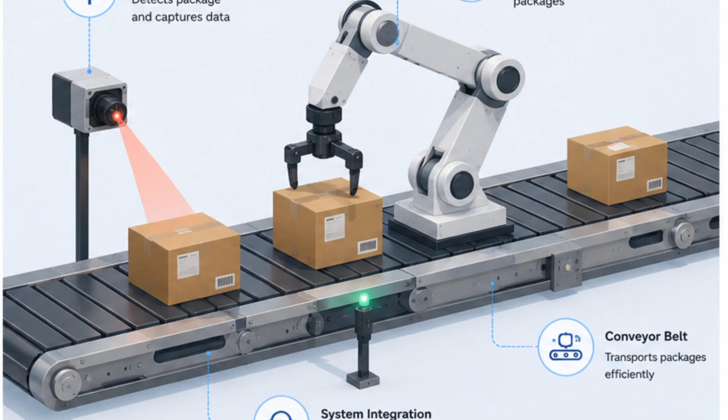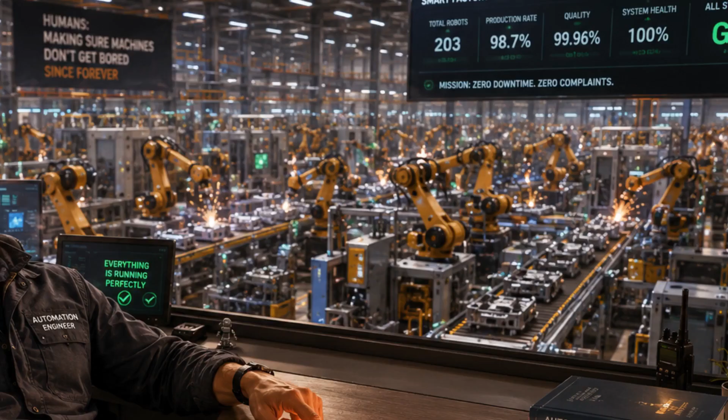In this video, we explore industrial automation, a field so powerful that it turned the humble conveyor belt into the backbone of the modern world, and convinced engineers everywhere that the best human intervention is minimal human intervention. No offense to the humans watching this video.

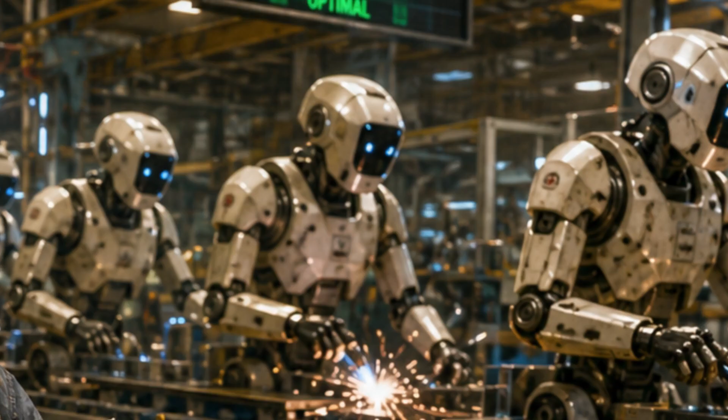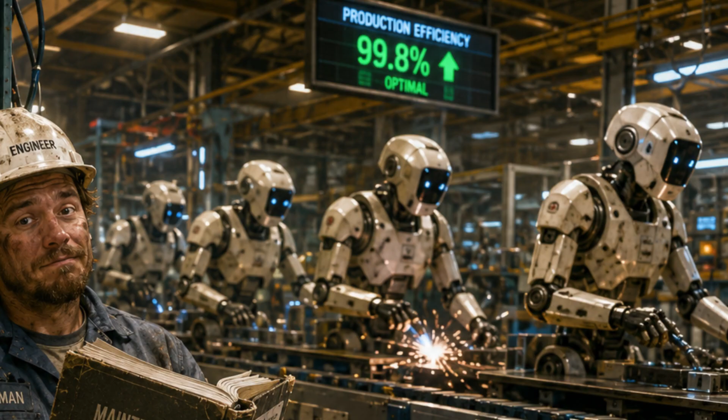We are still useful, mostly for defining the conditions, and still very important. People often say automation is replacing human jobs. Another opinion is: not yet. We built these machines so we don't have to work, and now we are spending all our time maintaining them. So honestly, the job is very much still there, and those cables are bringing in data and sending away commands to different machines.

Now think about the last time you used an app while resting in an air conditioned room, or saw a package delivered at your home. Behind every one of these moments, there is an automated system making it happen.

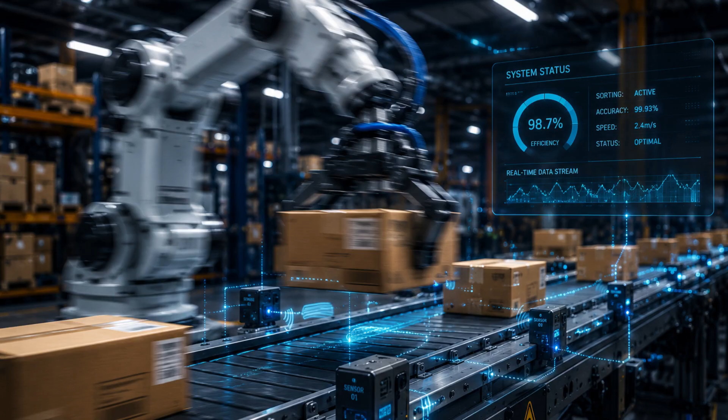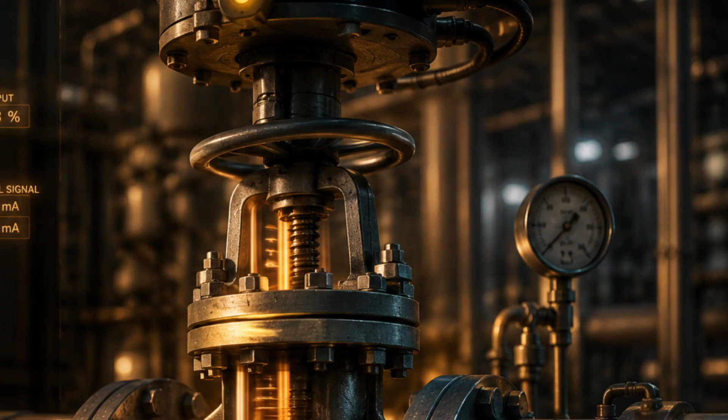Somewhere out there right now, a robotic arm is sorting packages it has never touched before. A system, with the help of sensors and actuators, is making decisions faster than we blink. And a valve in an industry is opening and closing based on logic that an engineer carefully designed for that exact purpose. This is automation in action.

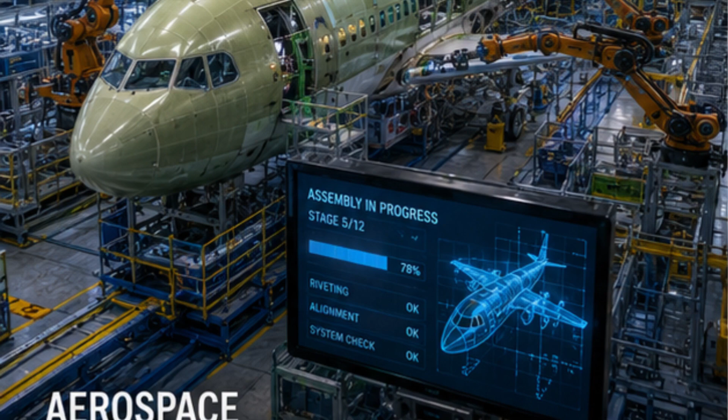Automation is no longer a specialty locked inside factories. It runs through healthcare, agriculture, aerospace, and every industry you can name. This is the foundation. Once you understand how these systems think, sense, and act, you will never look at the world around you the same way again.

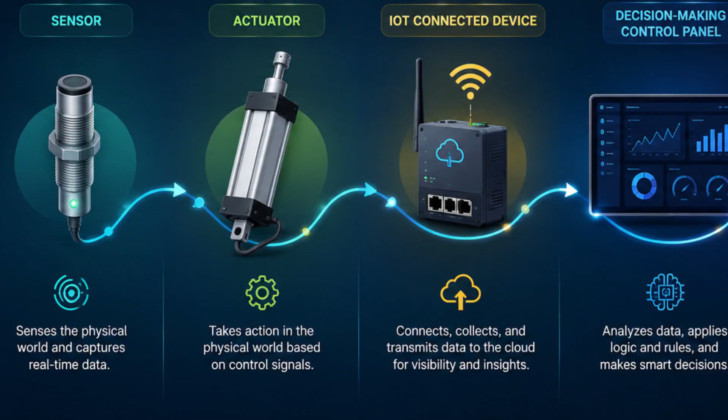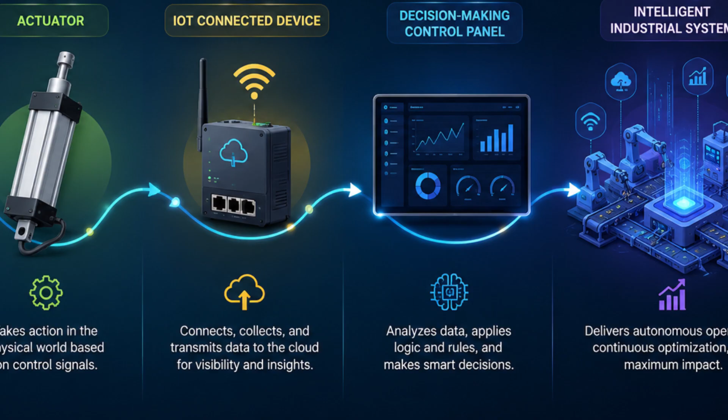So this video will take us from the very foundation, sensors, actuators, IoT, and decision making systems, all the way to the intelligence behind modern industrial control. The topic of today's session is industrial automation.

Before we start, imagine you are driving a car on a street and suddenly a kid jumps in front of you. What will you do? Will you apply the brake or further accelerate? Of course, apply the brake. If we want to understand this process, first we used our vision sensor, our brain processed it and decided to apply the brake, and accordingly different signals are sent to different muscles so that we can apply the brake.

This is how automation in industry is working. Through this session, we will understand how industrial automation works and how it has evolved throughout different industrial revolutions. The first question is: what is industrial automation?

To understand this, we have an image showing an old industrial setup where workers manually move different kinds of boxes and sort them, inspecting each box separately. After some advancement, motorized conveyor belts were introduced. The movement of boxes from one place to another became a little easier than before, but workers were still manually inspecting and organizing them.

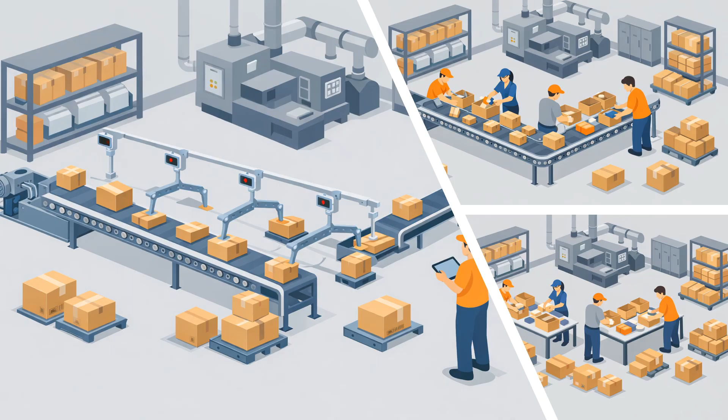With further advancement, we now have sensors, actuators, and robotic systems. The inspection process previously done by workers is now done by different sensors, and items are moved accordingly through actuators and robotic arms. Looking at all these scenarios collectively, from manual to automated systems, the number of workers has reduced, the effort given by workers has reduced, but the operational performance has significantly increased. This is how industrial revolution has been observed.

So what is industrial automation? It is the use of control systems to operate industrial processes with minimum human intervention. This is how we can define industrial automation.

For the foundation of automation, this is a very good example: in our body we have different sensors, we have eyes, we have skin. Through skin we can feel touch. Through these sensors, data goes to the brain, and the brain processes it and decides what action has to be performed, and accordingly different signals are sent to different muscles. Recall the first example: when the brain decided to apply the brake, it sends signals to our leg, foot, arm and hands, and collectively we apply the brake.

Taking this example to industry, we have different sensors in the industry. In this example, we can see a temperature sensor and a controller. The temperature sensor's information goes to the controller, which is designed by the engineer, and based on that design, a specific action will be performed. For example, if temperature rises above 30 degrees centigrade, the fan will be turned on. So the fan in this example is the actuator.

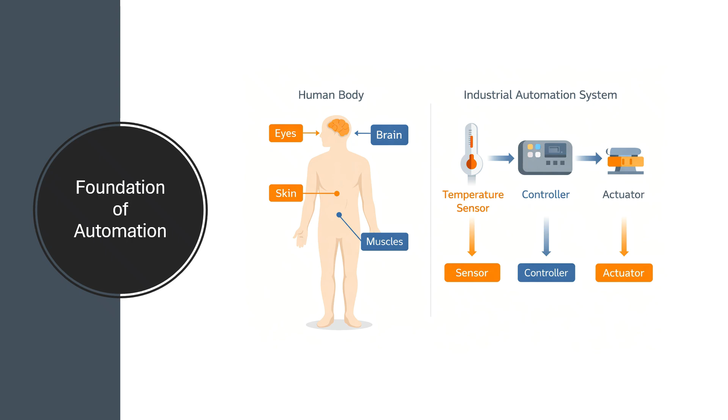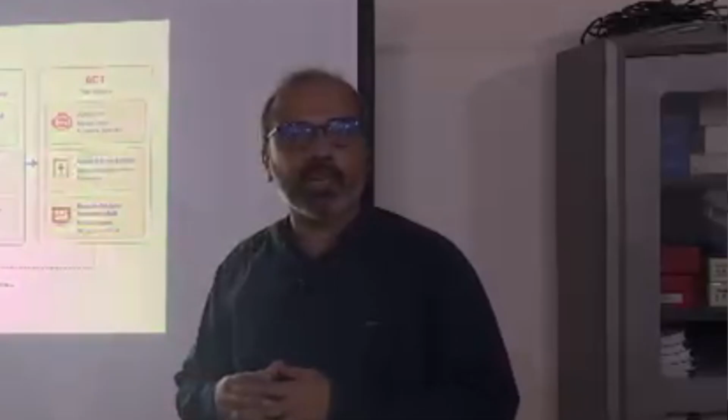So far we have heard three main components: sensing, decision making, and actuation. What is sensing? In industry we have different kinds of sensors: sensors for temperature, pressure, flow, either for fluids or for air. Once we have different sensors available, the data coming from sensors goes to the processors, and the processor decides whatever action is needed, and that action is performed by different actuators. In order to perform that physical motion, the controller has to send different signals to all the actuators.

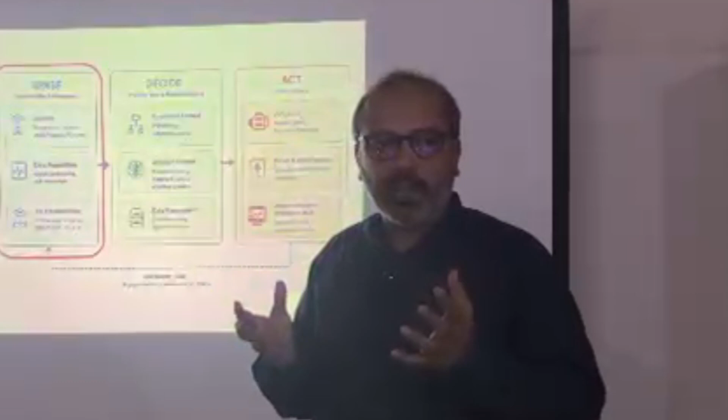So the movement and transportation of data through this system is done by IoT today. You have heard about IoT, right? So what are things in IoT? Let's see: we can see a sensor, a conveyor belt with a motor inside, and a robotic arm.

These entities are things in IoT, and those things are either generating data. Based on that data, the controller will be deciding something, and after the decision, based on the signals from the controller, the actuator will perform some action. All these things collectively communicate through some protocol, which can be wired or wireless, and there are several such protocols available for IoT. The data coming from different sensors and sent to different actuators is stored somewhere, and that data is not garbage.

That data is very important for analysis. Analysts can observe and analyze the data and identify which problem occurred at what time, so in the future, to avoid such errors, certain modifications in the system can be made.

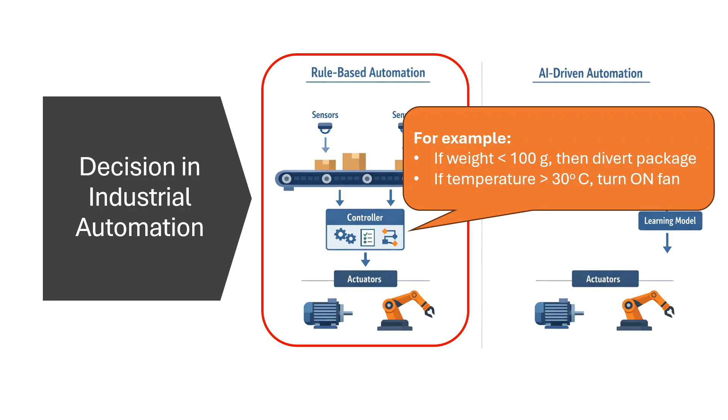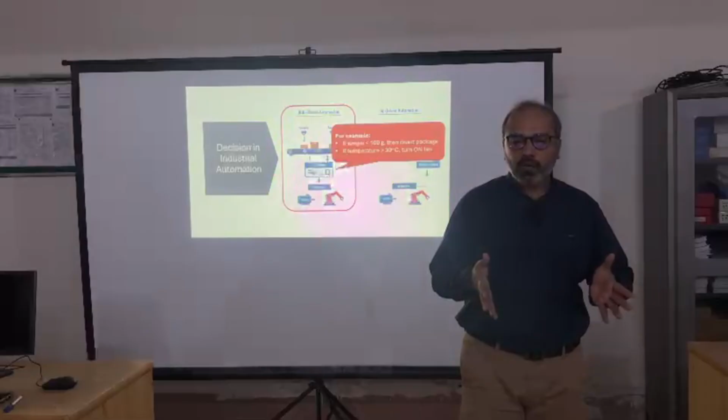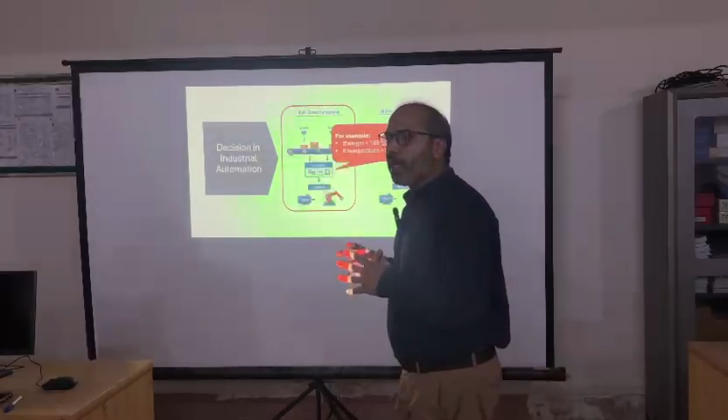In rule-based automation, the designer applies some rules. For example, if the weight is less than 100 grams, the package will be diverted from one conveyor belt to another. Or if the temperature is greater than 30 degrees centigrade, the fan will be turned on. In rule based automation control systems, the designer sets all possible rules.

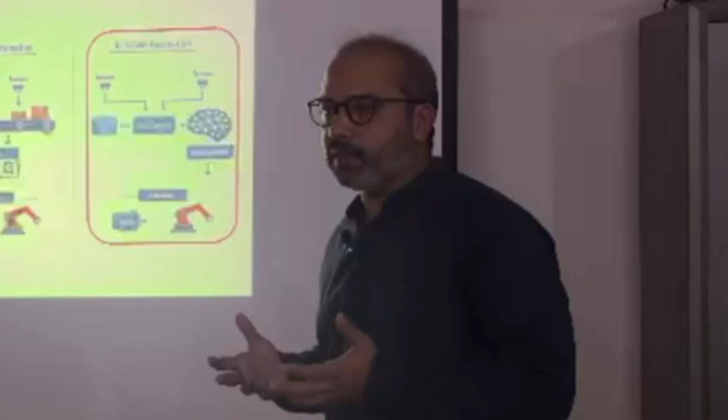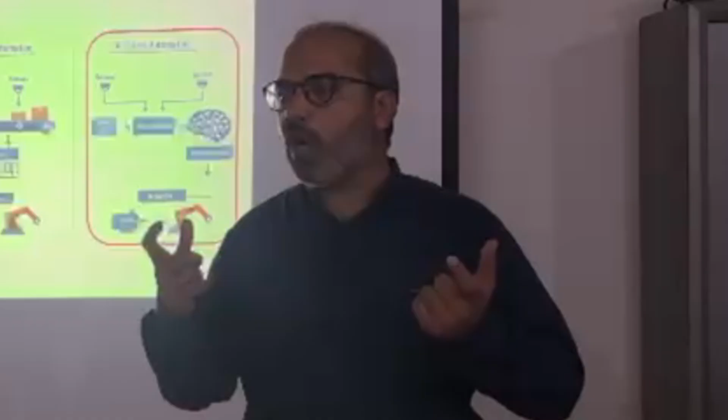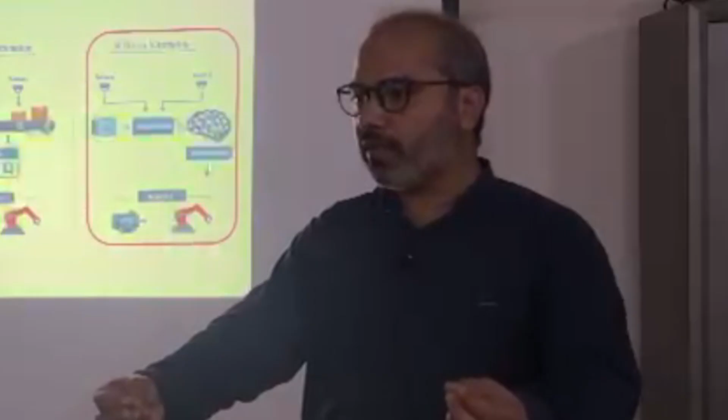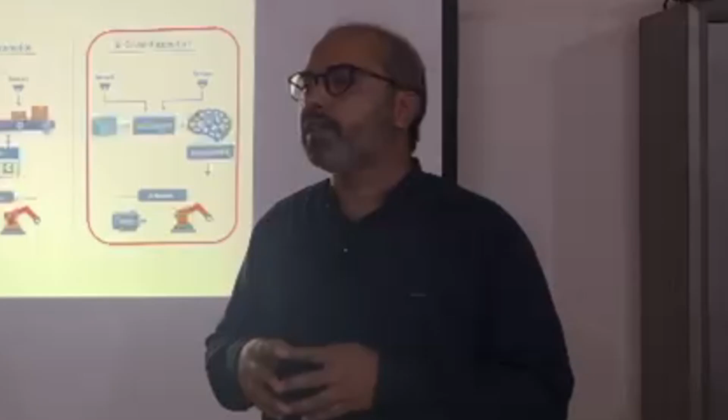So in AI based automation, the data coming from sensors is exactly the same, and actuation will be the same, but the controlling process will be different. It will not be based on if and else.

To conclude: in rule based automation, the engineer defines every condition, all possible conditions—if this happens, then this should happen, and so on—so there is a big set of if and else statements covering all possible conditions of that system. But in AI driven automation, the engineer defines the goal, and the system learns the behavior based on machine learning.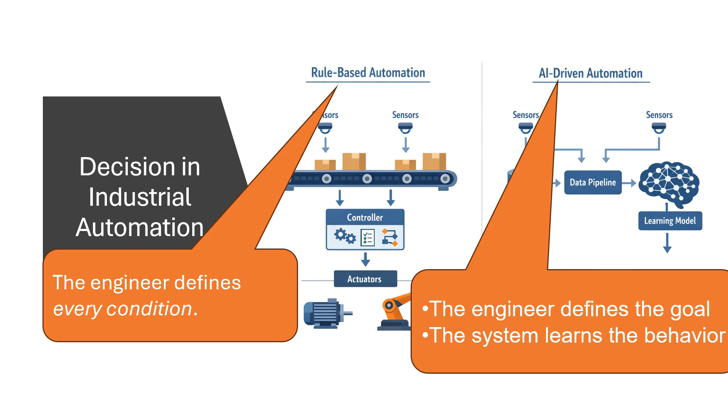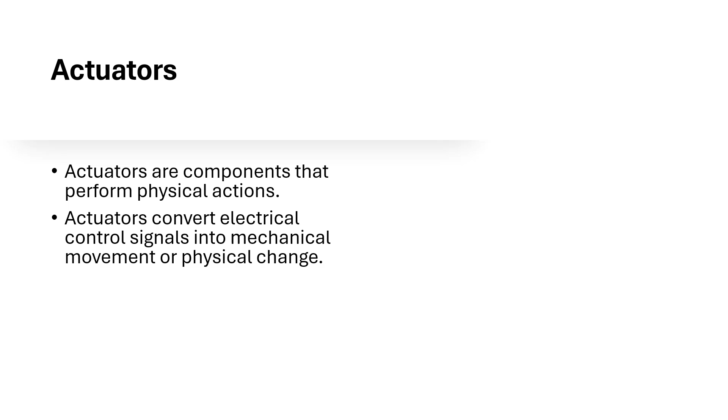After decision, as mentioned earlier, the action will be performed. To perform the action, there are different actuators. Actuators are components that perform physical action—devices that convert electrical control signals into mechanical movements. One example is a motor: we apply an electrical signal and based on that signal some rotation is done. We can use a motor in a conveyor belt to move products from one place to another.

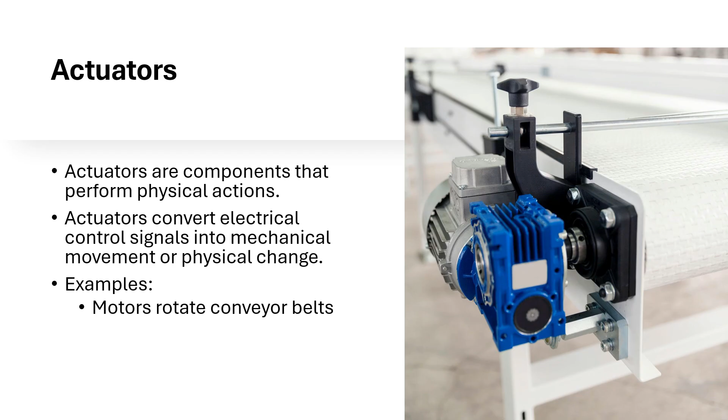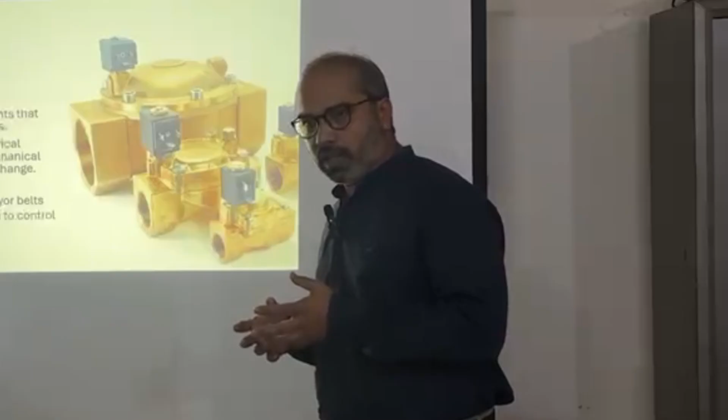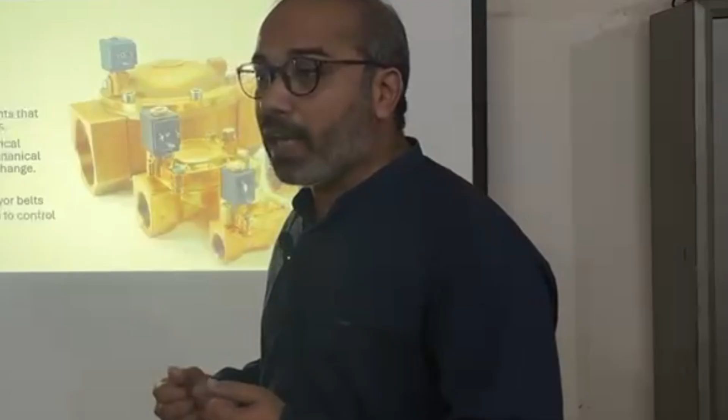Another actuator is the electromechanical valve. Its purpose is to control the flow of fluids or air—fluids can be petrol, diesel, or we can even use miniaturized electromechanical valves to control the flow of blood in different medical applications.

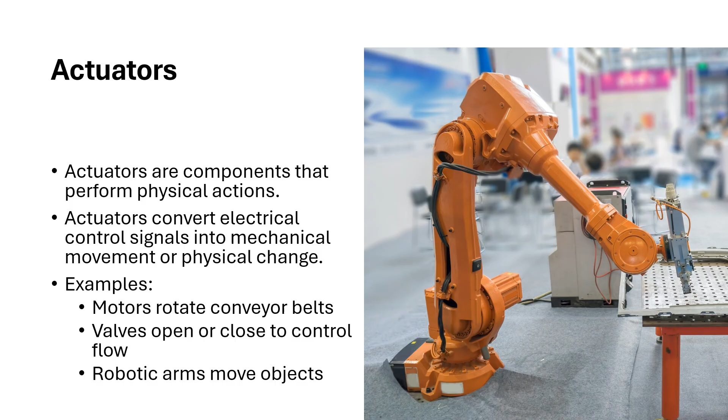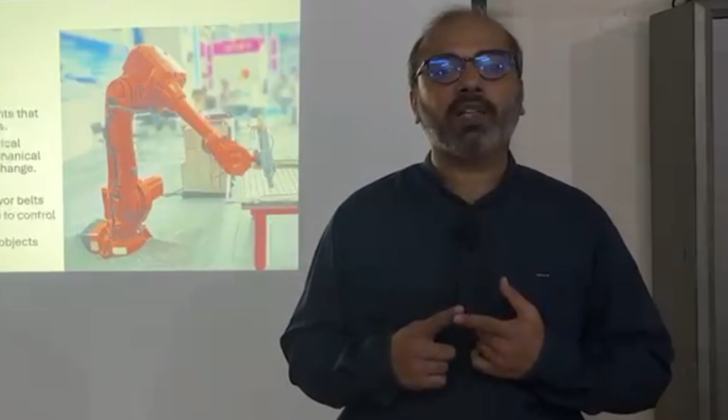Another example is the different kinds of actuators used in a robotic arm—that can be a motor, a spray, a soldering machine, or welding equipment. These actuators work based on the decision made by the controller, and the controller can be AI driven or rule based.

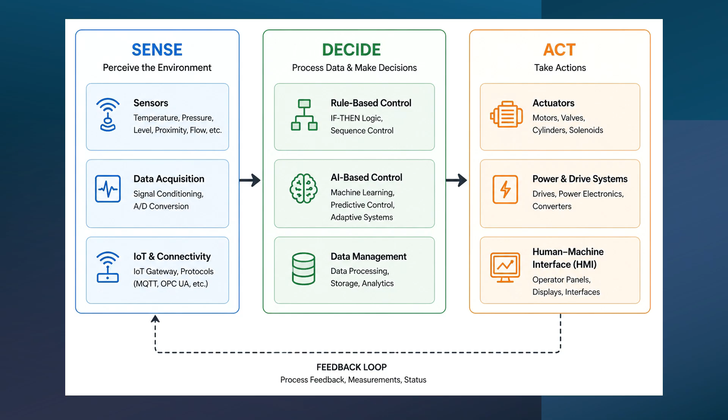So far we've seen sensing, decision making, and action performing. Now I'd like to ask where you observe sensing, decision making, and performing an action in real life. Let's take the example of playing cricket. In cricket, we first sense the ball's length, line, and speed. Then we decide what to do with the ball—whether to leave it or take a shot.

To wrap up, there is a quote by Bill Gates: automation applied to an efficient operation will magnify the efficiency. We have seen in today's session how automation gets more efficient by utilizing different sensors, different actuators, and advanced control systems.